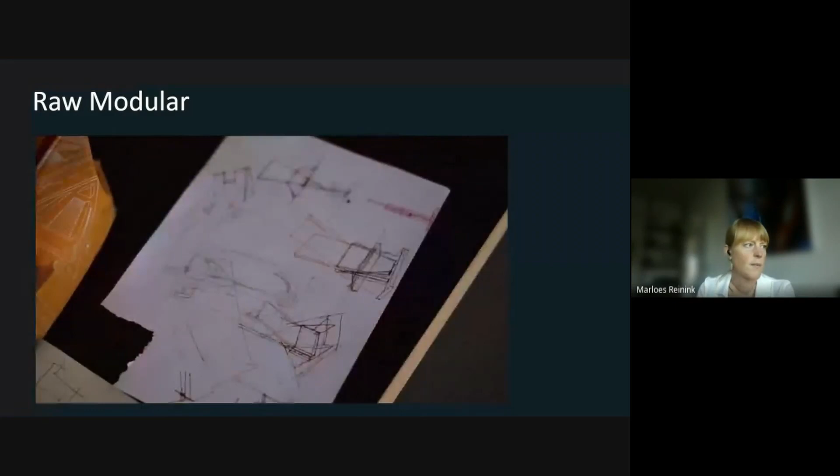Welcome to Raw Modular. 15 students from the University of Pretoria were given the opportunity to eat, sleep, and breathe the Raw Modular experience during a plywood design and construction week. The brief was simple: to design a structure or structural system out of modular plywood parts that spans at least 4 meters over an uneven surface and that can handle the typical directional forces such as tension, compression, torsion, and shear force.

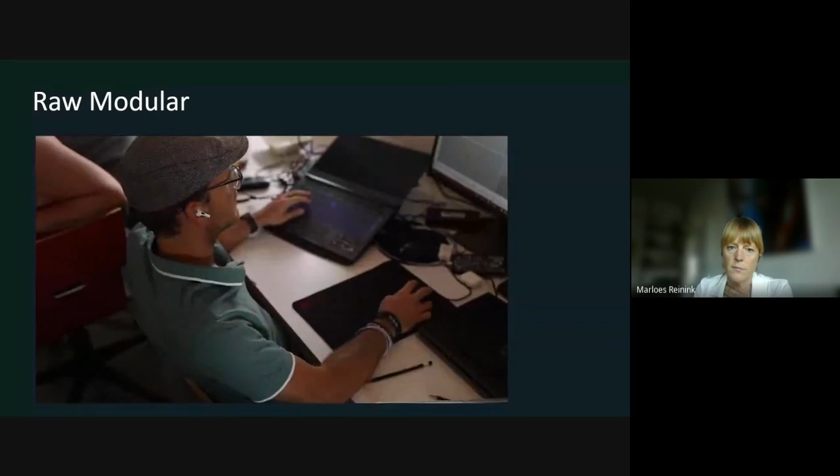Ultimately, they had one goal in mind: to produce a full-scale prototype that can withstand half a ton of pressure. The 15 students were divided up into 2 teams, eventually named Team Armadillo and Team Greyhound. Each team started by developing their ideas into concepts, which, guided by experts in the field, they were able to translate from conceptual designs into workable solutions using the latest CAD and CAM software.

Laser cutting and assembly of their initial design solutions into 1:5 scale cardboard models helped the students not only to analyze, but also visualize their designs before moving on to the full-size prototype. After a meticulous nesting and toolpathing process, an excited atmosphere surrounded the CNC machine as each piece was precisely cut. As a team, they had to work together to assemble and join the components. When the structures were assembled and many selfies were taken with the results, the only thing that was left was to test the prototypes by subjecting them to heavy sandbags.

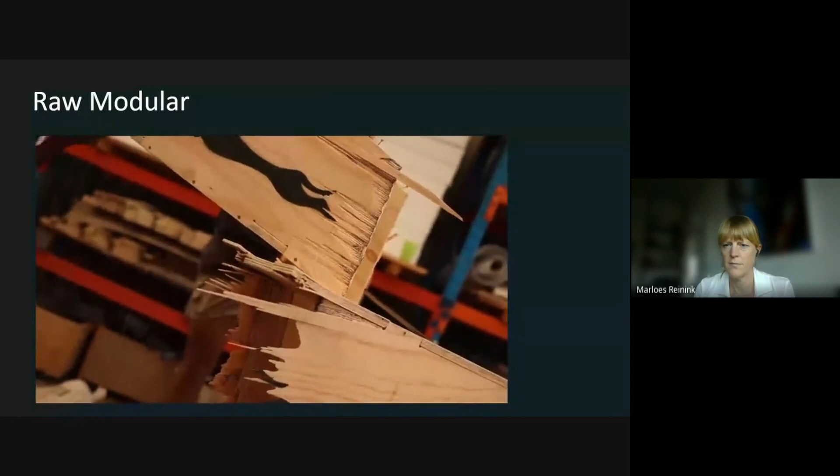As you can see, Team Armadillo's structure handled 12 sandbags with ease, which is the equivalent of 500 kilograms. Team Greyhound's structure did not make it to 12 bags. Due to a small flaw in their design, they were left picking up the pieces. Team Greyhound's error in judgment did make for valuable lessons being learned in the various ways of joining and fixing plywood. Let's take a moment to hear from the students about their experiences.

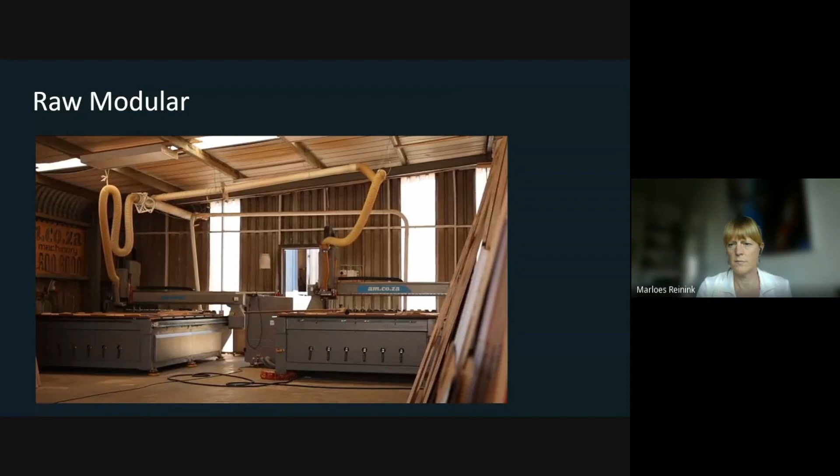Well, what I've enjoyed most about being at Raw Modular is, I would say, the sense of community in how the staff look after each other and how we work together in these tight-knit small groups. The most interesting thing we learned this week is the unexpected ways in which timber can be used and applied in different ways. Piet and Clara have been amazing. So this whole environment has been quite conducive for us to learn more, in terms of digital workshopping and construction.

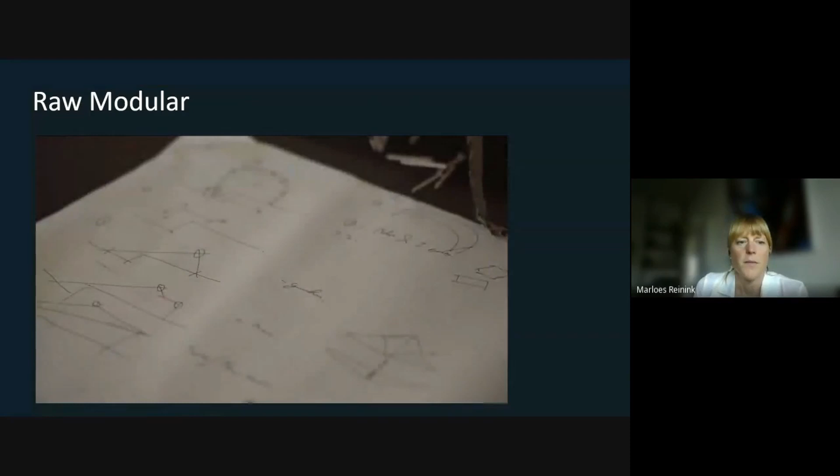I think one of the coolest things I've done was the camping experience. Yes, it was a bit cold in the beginning, but then I guess we have adjusted so far. Getting to know one another, getting to learn from one another, and also seeing the progress from students, how they learn all the skills in a very short period of time. And the output's been amazing. How a theoretical idea translates into a physical item and working with your hands to accomplish that.

We're here with 15 students this week. These are architectural students who are eager to learn about digital fabrication and timber construction. So the University of Pretoria, in association with York Timbers, have set up this program to further the timber construction industry, exposing young architects to ways of fabrication, ways of design, structural, plywood, strategies, etc., to get them up to speed with the fourth industrial revolution, as they're calling it.

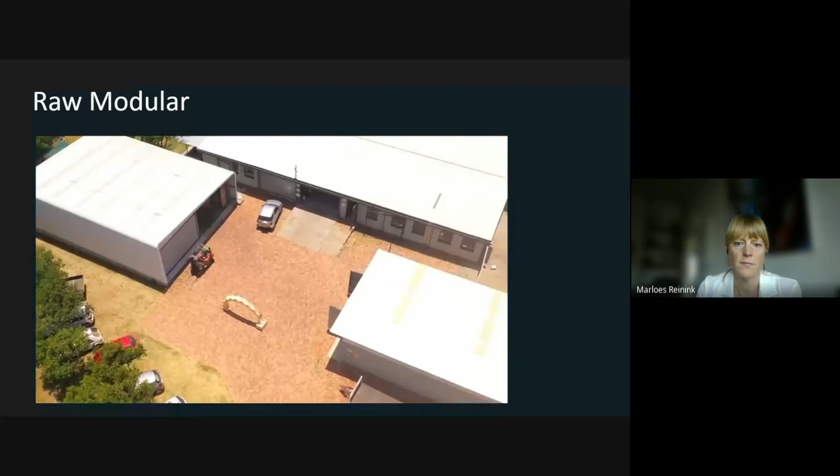To the group of students, we've learned so much from each other. We were seriously impressed by the way you approached the problem from different angles to create two very different, yet innovative outcomes. And we are extremely excited for what the future will bring. From all of us here at RAW, we thank you for this experience.

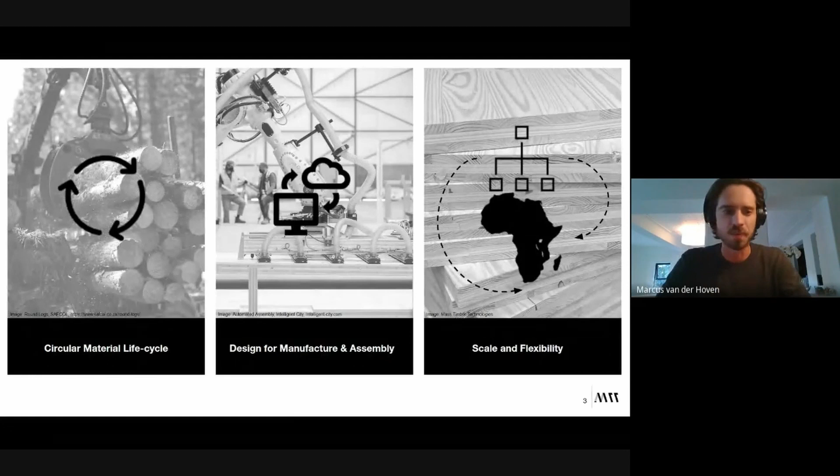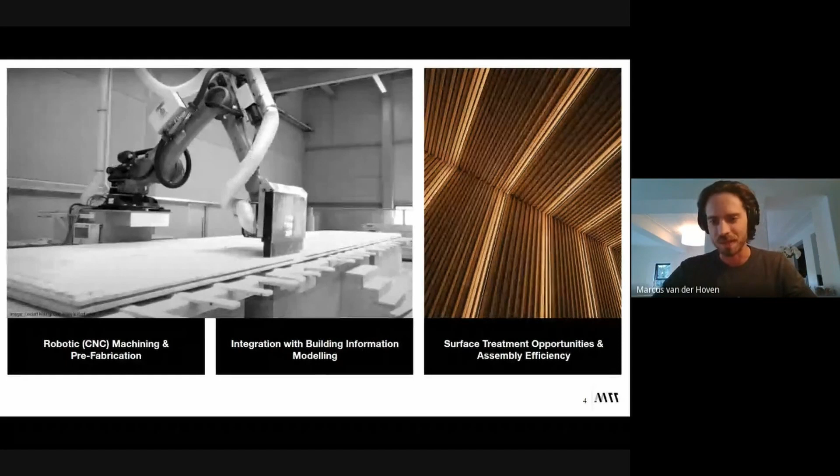And it's important for us to bring some of these concepts forward as we become more aware of the impact that construction has on the environment, the impact that it has on our economy, and the impact that it has on our future. And it's important that we don't really sit back and wait for the disaster to unfold, but stay proactive in developing and continuing the progression of material knowledge, fabrication ability, and design capability.

So today I'm going to touch on 4 key aspects that we think are really important for the larger industry to start becoming familiar with as we design mass timber structures. We've managed to figure out the process of creating the material from a locally available source. And now it's up to the construction industry to skill itself up to accept this material into its process.

Testing of the material all the way through structural, fire, economic, and in terms of longevity, we've been able to prove these concepts throughout the mass timber life cycle. And we're finding that a lot of the key aspects that need to be worked on at this point are really the understanding and the capability of architects, engineers, quantity surveyors, and consultants in general to really engage with the projects of the product and allow it to integrate itself a little bit better into the environment.

Just to touch on a few elements again, to drive the message home for what we're talking about and why this is relevant in the larger construction industry and the larger drive towards a more positive, sustainable environment. We all know what the impact is of construction on the environment, and key to this is the impact of the manufacturing of a lot of these materials. When it gets to site, that's one thing, but the production process of elements like steel, aluminium, and concrete bear the brunt of the force of CO2 emissions and the global warming impact on the environment.

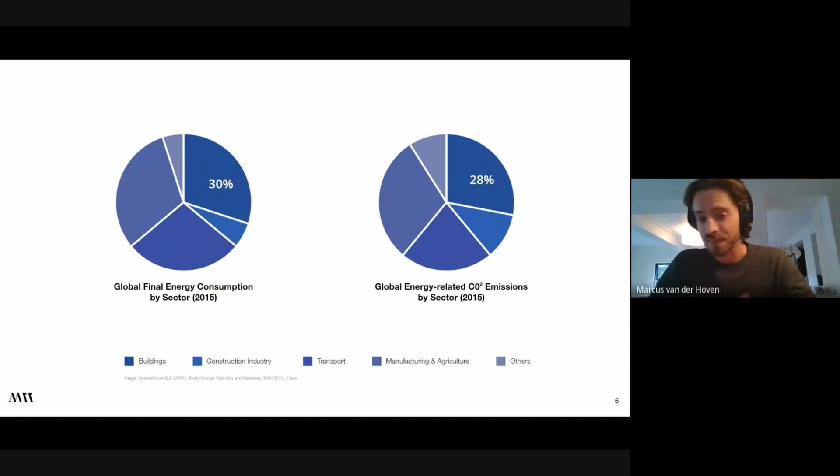And this is where we see the low-hanging fruit really for a new structural material that can replace a lot of different elements inside of a building and have a massive impact on our environment and the health of people around us. And that's really what we're tackling.

Importantly, again, these movements are happening all over the world, and South Africa seems to be dragging its feet. As a total population, our local GDP ranks only 32 in the world. So we're not really punching to the weight where we're actually emitting. We're listed as the 12th highest emitter of CO2 into the atmosphere globally, but we don't seem to be pulling our weight in terms of economic contribution. So we have quite a lot of catching up to do.

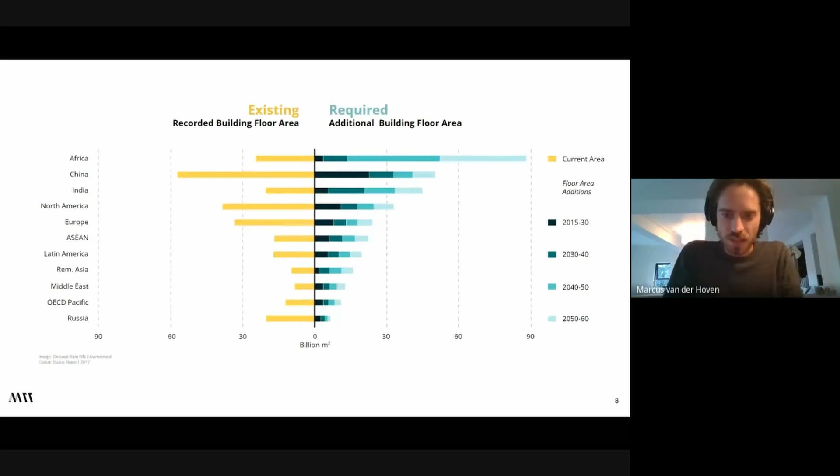And when you contextualize the requirements for building in general over the next couple of years, you can see that the population requirement and the development requirement in our country is far exceeding that of the rest of the world. So it's our opinion as quite a young team that there's going to be a serious boom in construction and construction requirement in Africa over the coming years. And we need to have the technology in place to be primed and ready for this boom.

There's a lot of different elements in policy that are also starting to affect us. We've seen that the C40 policy that's come through over the last couple of years is aiming to have new builds in South Africa net zero by 2030, and all buildings by 2050. And what's interesting is that it's not only the architects that are understanding this and fighting for this, but developers are starting to open their eyes to this.

This is probably going to be one of the largest liabilities on a development portfolio inside of the next 10 to 15 years. So there's huge progression in terms of thinking and questions that are being asked in new project developments that we're exposed to. And it's up to us to really develop the technology to feed this hungry monster of construction.

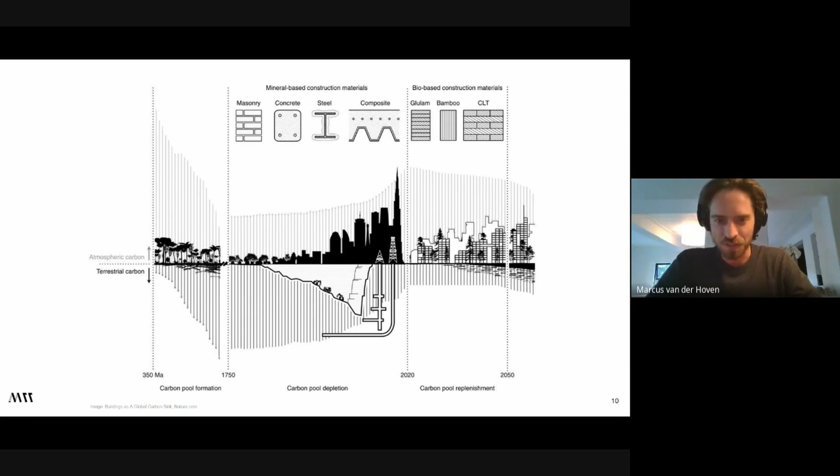We're seeing this large movement from a mineral-based material system to a more organic, bio-based, fiber-based system. It's a process that's happened over millennia in terms of a carbon pool being generated through trees decaying and turning into coal, and then us mining that over a couple of 100 years, and we're trying to basically turn this thing on its head and replenish our carbon pool back into the earth and sequester it so that our atmosphere remains breathable and our temperatures remain cool.

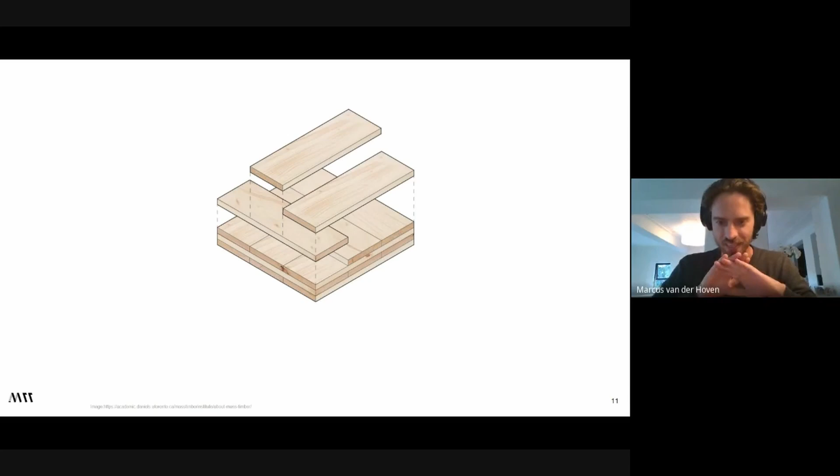So let's talk about CLT as the solution. I'm not sure how many of you are familiar with cross-laminated timber, but it's a fairly simple concept. We're using the structural capability of solid timber, and we're basically adhering it together in a cross-laminated perpendicular lamination, which essentially allows for an understandable and, what's the word I'm looking for?

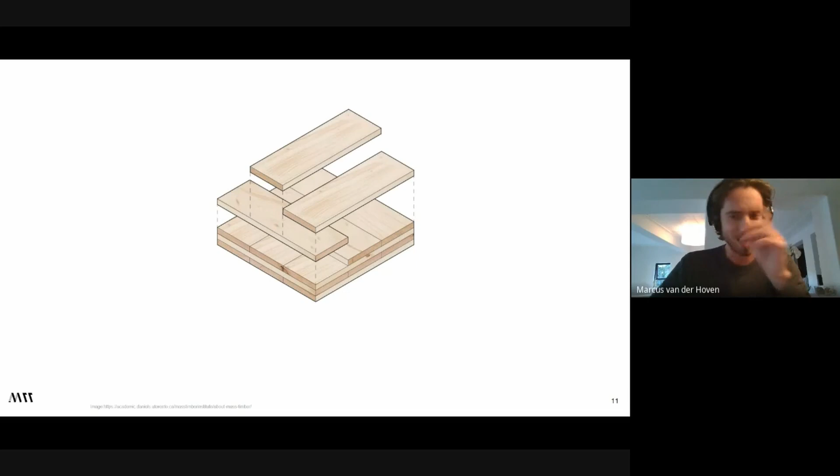An understandable engineering curve, so it's predictable. It's a predictable engineering value that we can then design with in a rational way. Organic materials tend to have different strength characteristics throughout their actual form, and we're trying to turn that organic material into a uniform number that we can then design with rationally and predictably.

And that's just one of the elements that I want to discuss today, which is hybrid timber construction, where we make use right now in 2023 of the best characteristics of each material, where concrete may still be required to perform a certain requirement, but we can actually replace a majority of the concrete we would typically use to construct the remainder of the building, or use timber specifically in primary structural elements to lighten the load of that structure, lighten its foundation loads, and sequester carbon while we're doing it.

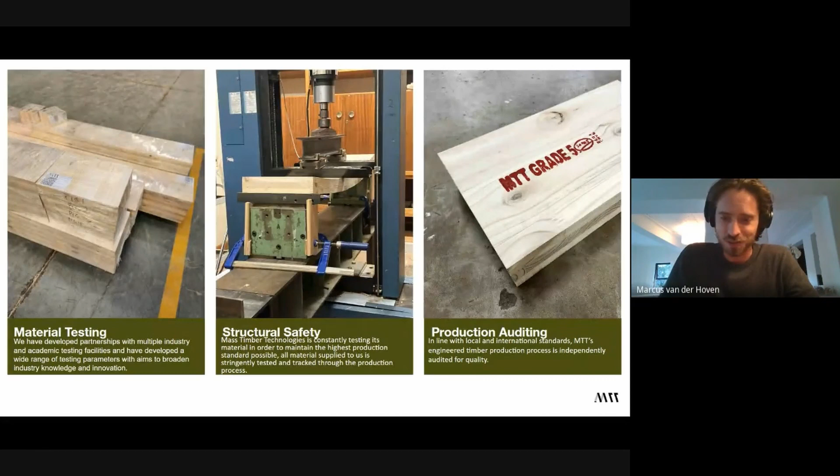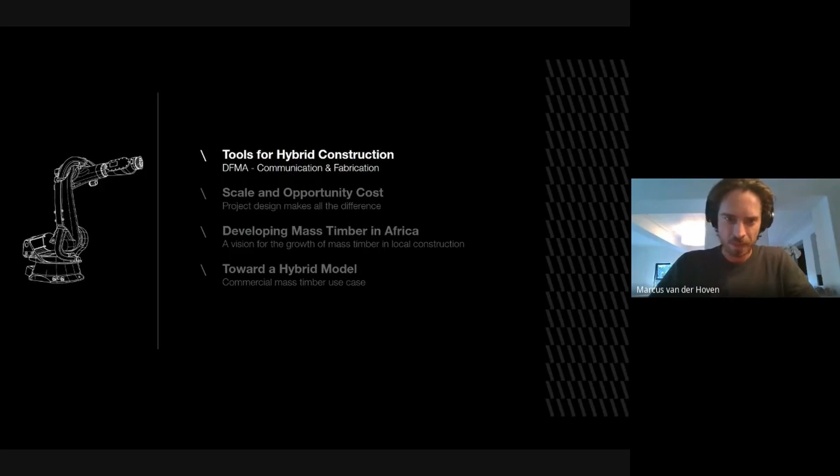So some of the things that we need to just run through in terms of designing. It's all good and well that we want to design with CLT, but how do we do it? The big questions are really around the cost. It is more expensive than pouring concrete. That's true. We're getting pretty much to the same price as steel now, with the price of steel going through the roof. But we need to really look at how we make the process more efficient to make the product more efficient in terms of its costing. The whole costing profile needs to be redesigned, but there are really interesting ways that we can make this process work from the design side, rather than trying to replace concrete one for one on a project. So the first benefit that we have with CLT is prefabrication and robotics.

So our system at MTT runs around the CNC manufacturing process. We have a robot like this on its way from Spain. It's pretty much identical to what you're seeing here, where we've got a really massive saw blade attached to the end of an industrial robot arm, and we've designed software that will essentially allow us to run from any design software like Revit or AutoCAD or whatever it is that your profession works in.

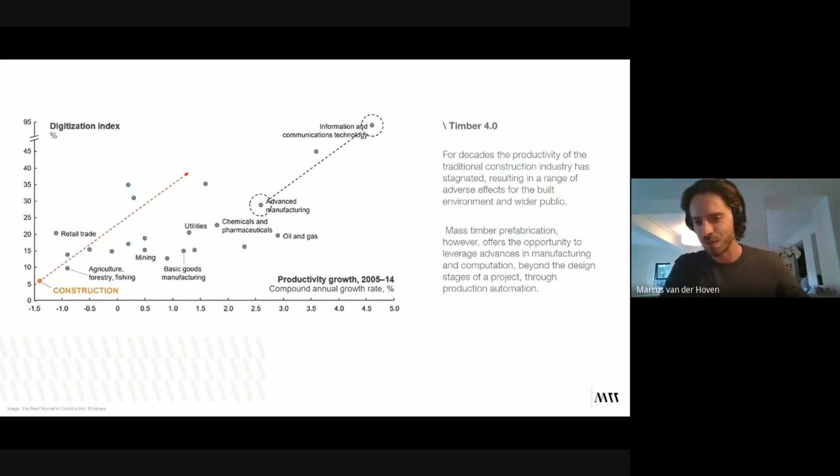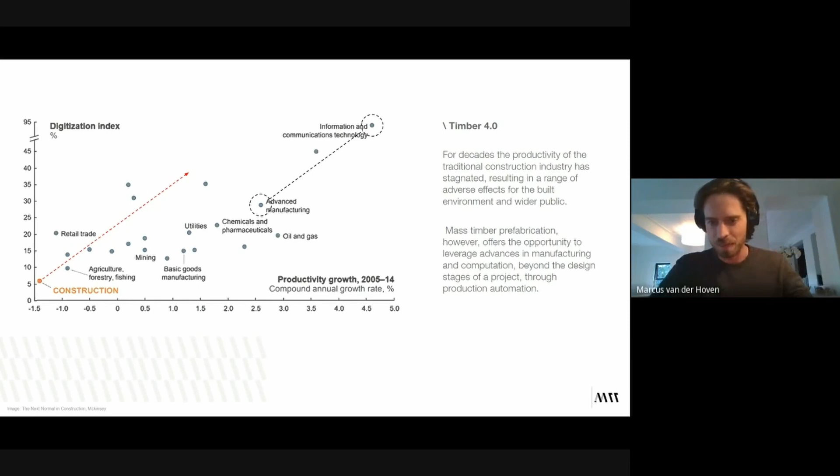So how we as professionals communicate with one another to make the process more efficient, to limit waste on site, limit changes on site, and allow us to get to a building much faster and help people execute the economics of their building more quickly. So getting people renting their structures faster, less time in your lending profile where your building is actually not being productive. And that's what we're trying to do. This is rapid build with a low waste profile.

The two products that we focus on at this stage are cross-laminated and glue-laminated timber. There's a lot of timber products out there that we could explore, but these two were the low-hanging fruit for us in terms of understandability, and our ability to actually engage with the value stream and the value chain and get it to market as fast as possible so that we can start innovating in the timber space quickly. So cross-laminated timber is really a very large block that could work as a floor slab, a roof slab, a wall, but really a primary structural element that can carry load. And GLT is columns and beams. With those two elements, we can start attacking quite a lot of different elements of the structure. And this is where we wanted to start with the process and start innovating.

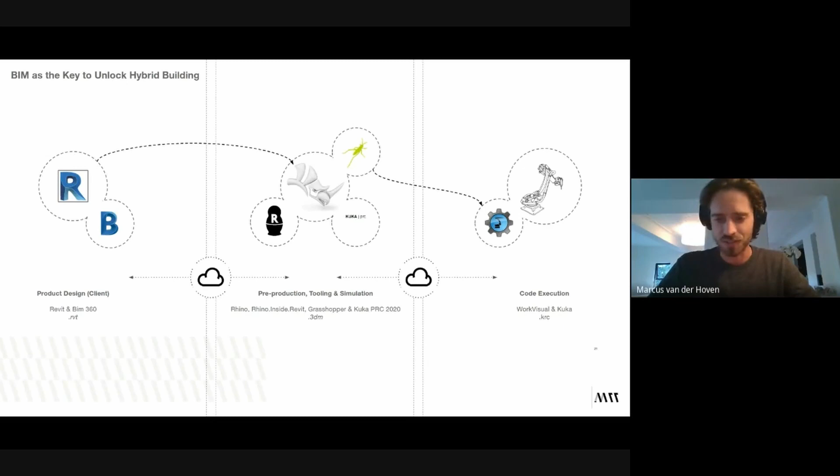The next thing that we started looking at was exactly that integration of Revit and building information modeling systems, take that into a manufacturing system. And this is, again, something that we're not seeing in the construction industry at this point. Usually we're looking at plans. As plans get submitted to a builder, the builder tries to figure out the formwork on site. It takes months to figure it out. There's often mistakes and rebuilds in place, and that's waste and that's time, and those are things that we don't actually want to do on our construction sites. We want to be quick, clean, efficient and healthy, and those are the elements that we're trying to push forward.

So once we start understanding the benefits of CLT, of course there are downsides to CLT. There's a lot of elements. It's not a silver bullet that's going to solve all of our problems, but we need to understand what it is that we're looking to make more efficient inside of a building. And I won't go through all of these. We don't have enough time. All of this is available on our design guide, which is free to everybody off of our website. You can go and download it and you can run through it. And it's quite a nice document to actually just familiarize yourself with all of those elements.

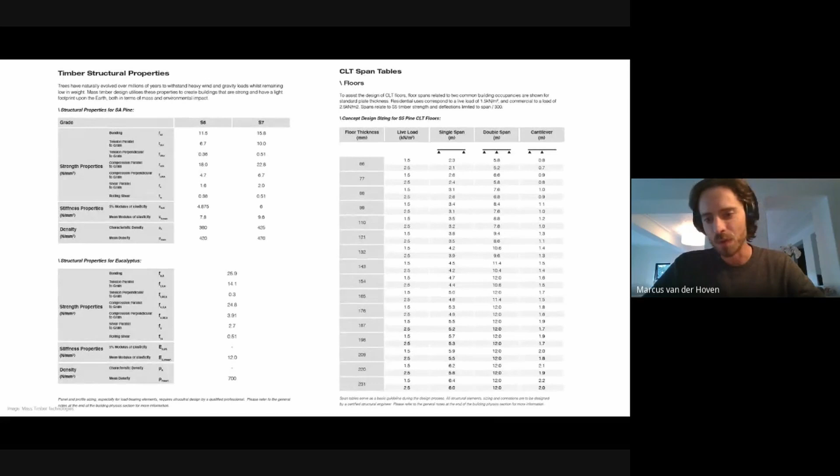We've even done all of the hard work for you guys. We've worked out all the engineering. We've tested the material. We've worked out based off of multiple different samples from different materials all over the country to get a rational design point where we can say, this is what SA pine at this grade and this is what eucalyptus at this grade are going to do. And you can actually start designing your structures now. Of course, we'll be able to assist you with engineering and your product design and your connections and how it all comes together. But ultimately, the work's been done.

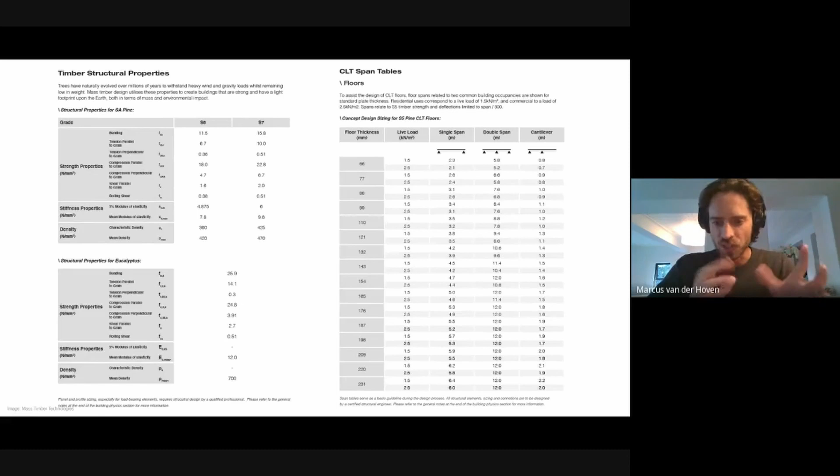So you can actually engage with this design guide and go and apply all of these elements to your own design thinking and start developing your buildings with mass timber in them. The thought concept here really for us is to move this whole process where when we start just designing and engaging with a project

program, we see that we've got to do a lot of different work. As an architect, I kind of get to engage with a lot of these different elements. An engineer has to engage with a lot of the different elements. The green consultants have to engage with 3 or 4 of these elements, and it creates this very sort of intersecting mesh of concepts that need to be rationalized between multiple professions.

And this is what we need to do on the cloud space with the building inside of a 3-dimensional space that can be shared and worked on collaboratively. And where changes are tracked and understood, we can actually work on these elements way more efficiently than trying to do it on site. And what we're trying to do is basically create a system whereby after all of this cross thinking and interweaving of professions, we just really want to put out a very simple process for the construction system, because that's where we see the waste and that's where we see the efficiencies really lacking.

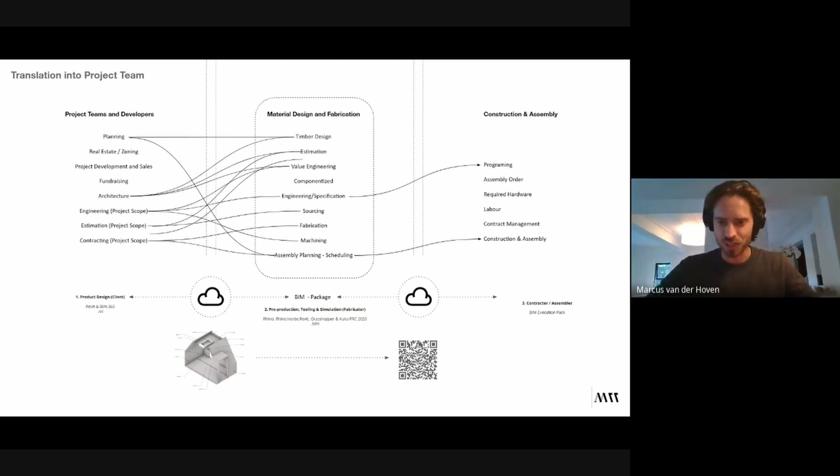We don't want to see this mesh on the other side of the material design system. So once it gets into construction and assembly, it needs to really be a program and an assembly diagram. So we're starting to think of buildings and building components as QR codes or barcodes. We can then just track parts, know exactly where they go, and think of it like a Lego instruction kit where you've got 3 parts, an assembly order, and anybody should really put this together without an issue.

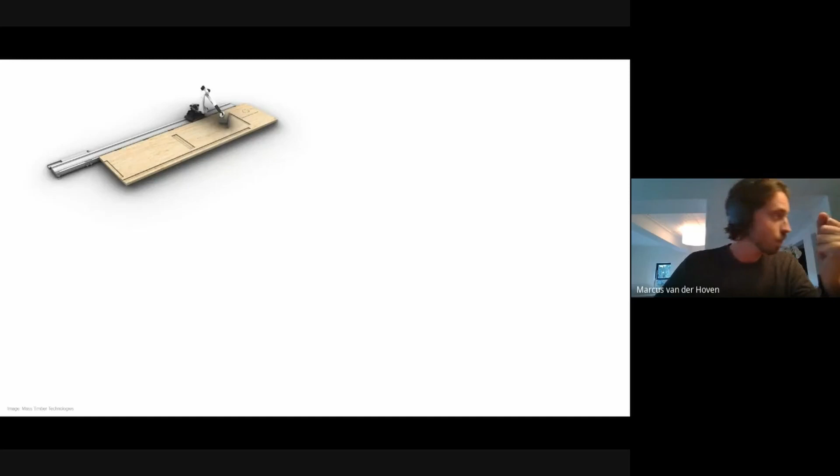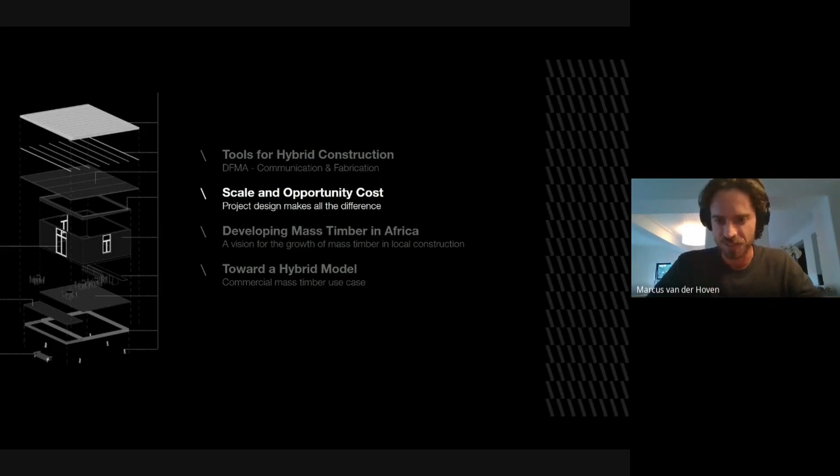Once we've gone through all of this work together, once we've actually completed the design and information modeling system, we can then go and cut these elements out on our CNC program to a very high accuracy, which again helps people just put things together on site in a way more effective manner. Once we've actually put these components together, it's important to just understand the scale and opportunity costs. And this is again where we start to rationalize the elements of CLT production in a contextual way in South Africa.

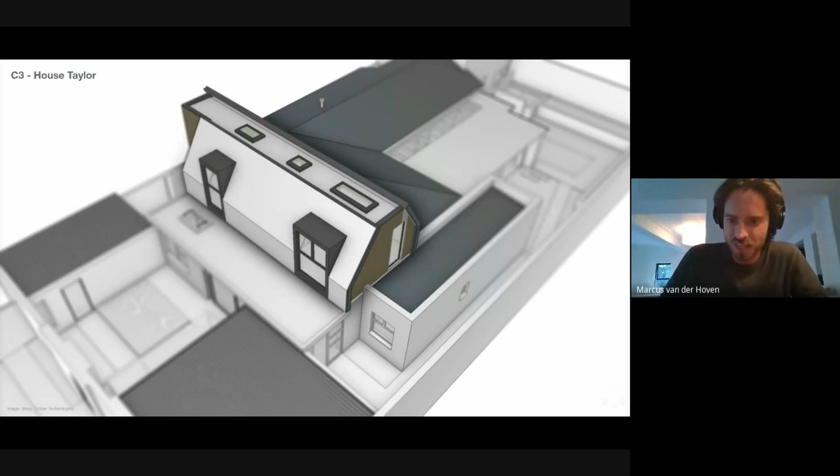So one of the projects that we've been working on is this House Taylor system that we've worked on with a local contractor, a designer out of Durban. He's done a project where they've removed a section of the roof and they've actually just placed a new first-story addition on top of the existing building. And a lot of the work they wanted to do was to actually ensure that the bottom of the structure was unharmed. They have a very expensive floor system on the bottom, and they didn't want to pour concrete slabs, and they needed to do this in a very rapid way.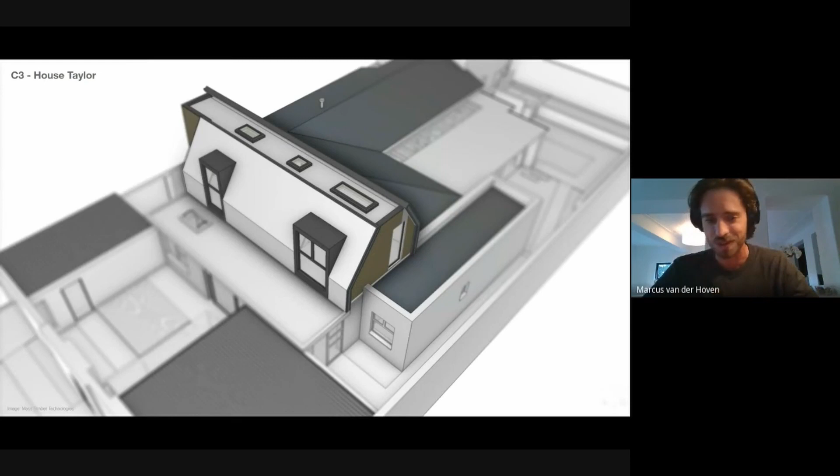So we designed this system. It was an entirely prefabricated system. We never actually met the architect in person, but we rationalized the whole system over a BIM conversation. And we created the kit of parts for the contractor to work with, and did all of the different component drawings. And we constructed this model as a mock-up inside of our factory. It was important for us to test this, as it was quite a complex geometry that we needed to put together.

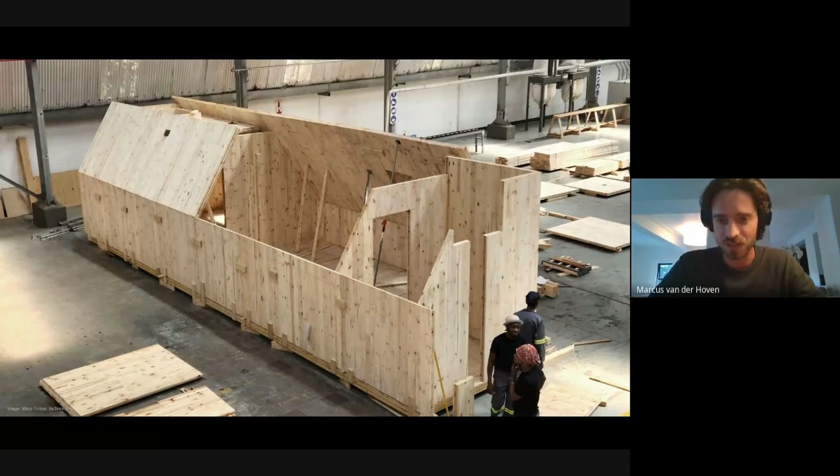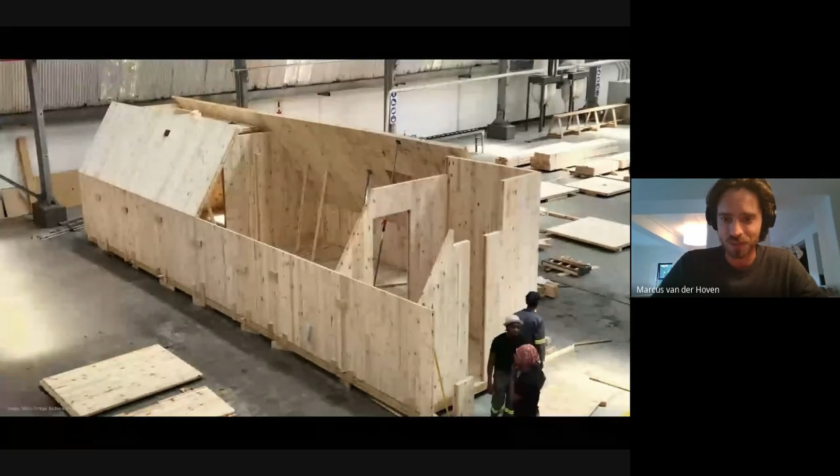And we managed to have a contractor come in with the help of our gantry crane, but without any of our assistance. A person who's never worked with CLT before was actually able to assemble this entire structure inside of one day, which is quite an achievement in our mind, considering how complex the geometry is. So this building is actually going to site next week, and there were quite a few delays with the weather over the last couple of months, but we're excited to see this happen in the real world on top of the structure. And there it is in its completed form.

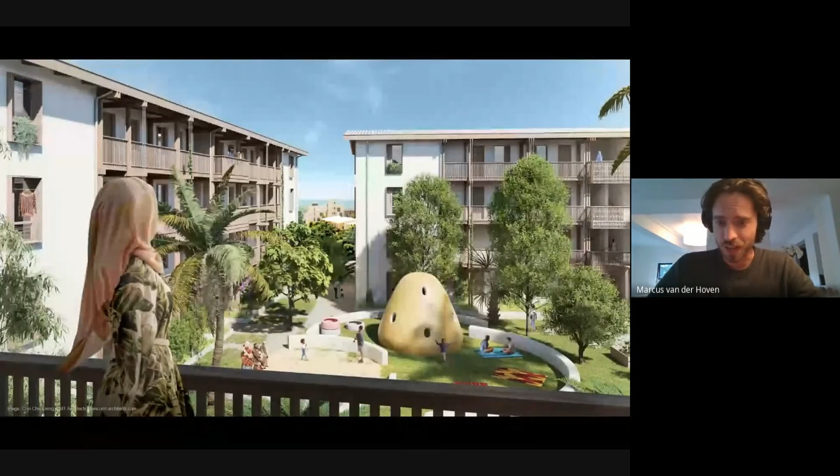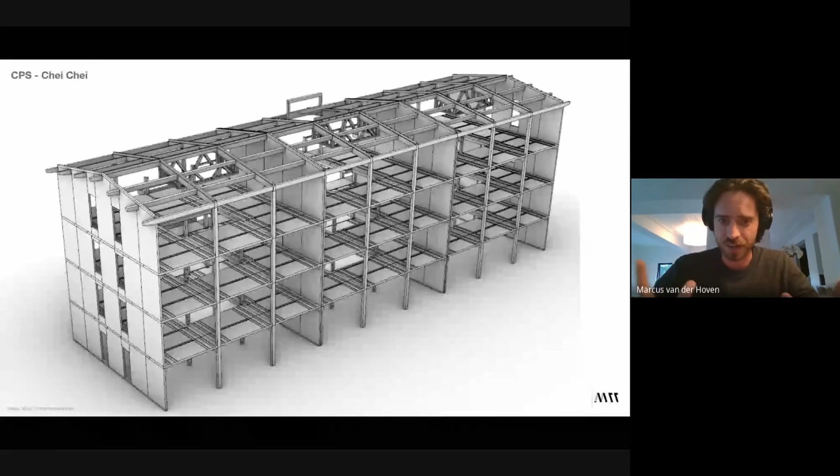The only element inside of this building that isn't timber are the concrete cores, which were kept concrete for fire regulations in Zanzibar. And the rest of the structure is glue-laminated beams and columns, and then the walls and the floor slabs. So again, the whole process was worked through a project team inside of a BIM space. We had an architect out of the Netherlands, an engineer team in Germany, and then we had the contractor in Zanzibar and Germany. He was running between the two. We developed this entire building all the way from nothing to completely fabricated without any of the project team being in the same room. And that's just testament to the power of building information modeling.

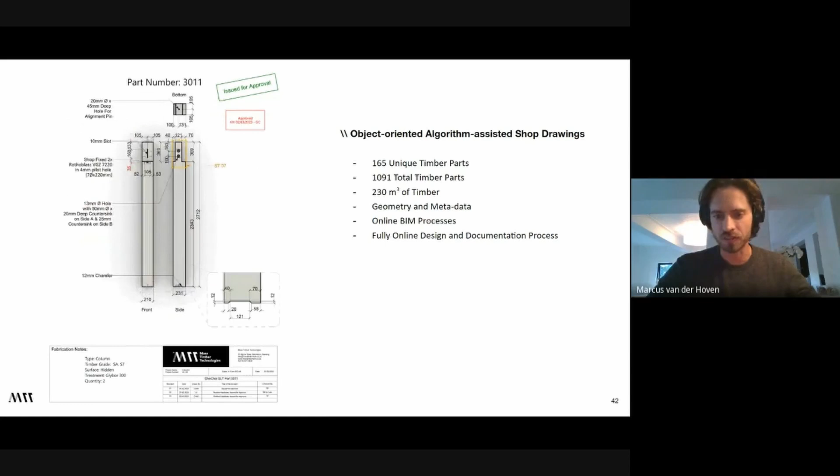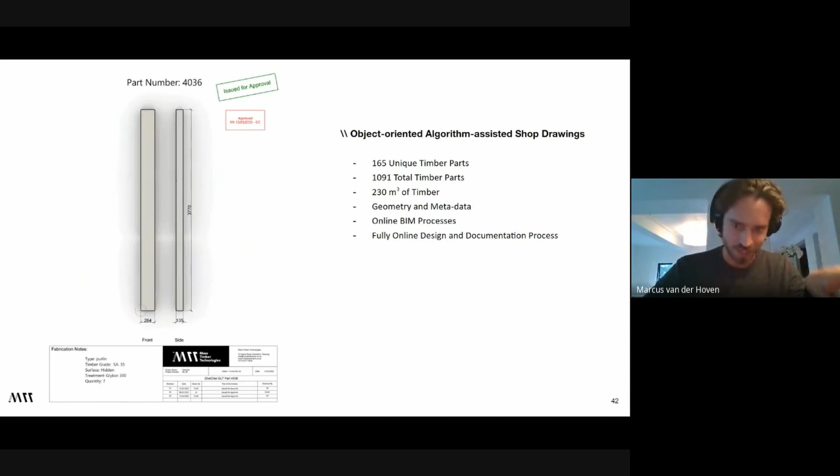You know, it's quite a unique project in the sense that we understood what the challenges are going to be for mass timber on this scale, where we've got concepts of 165 unique timber parts and 1,091 total timber parts that need to be designed, drawn, documented, fabricated, and then shipped in the correct order to ensure that the production system is put in place.

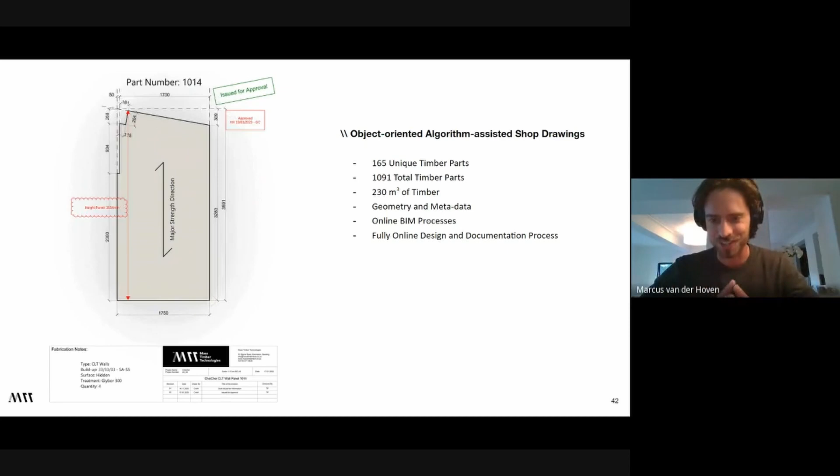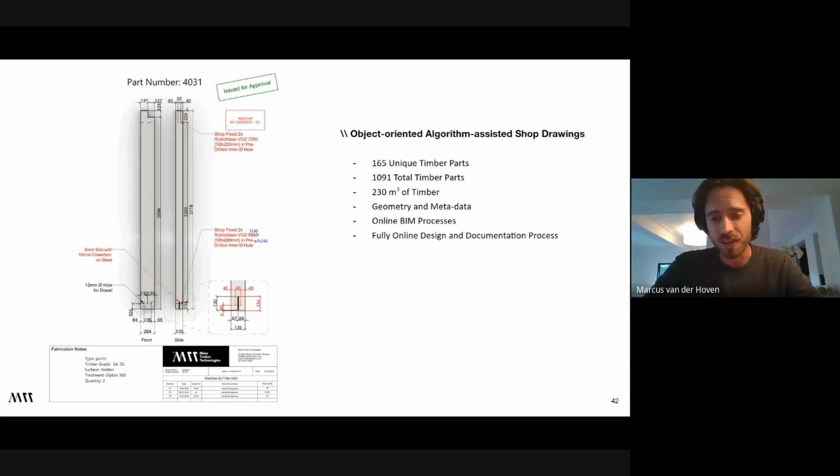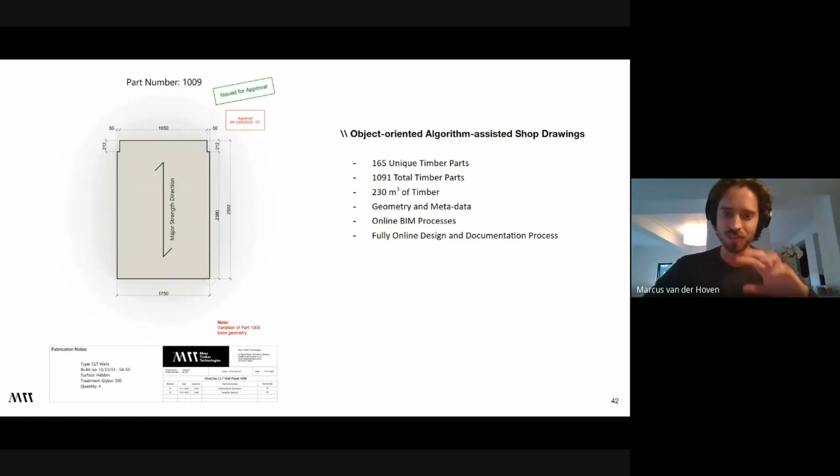But again, because we're smart millennials, we've managed to design all of our integration to happen inside of a computing space. So none of this work was really tediously drawn by a poor technologist sitting behind a computer and being fed Red Bull all day. This was a process of about a week. It was done by one person, and it was sent out inside of that week for approval. So this is where we see the power again of understanding your Rhino and Grasshopper integrations, being able to parametricize not only your design but also your documentation process. So this has helped us really elevate with a very small team and become quite effective in terms of being able to deliver these large structures.

And there it is. There's about 230 cubes of timber, weighs about 115 tons of timber. We produced it in about 3 months, which was a bit slow for us. We thought it would be a bit faster, but it was a bit of a supply chain issue over December with all the rain. It's leaving in containers next week, and we estimate that the structure will probably be built inside of a month, which they tested on site with another building that was exported out of Germany. So our cost profile in Africa is just a lot better. This is why they're engaging with us, and we're excited to see our first multi-level structure go up this year still.

So again, back to the design guide. Through this process of designing that building with the Germans and the Dutch, we've managed to leverage a bit of their design thinking to help us develop a set of details that are a bit more contextually relevant to South Africa. So we're not designing walls that are 500 millimeters thick with 3 insulation barriers and moisture barriers on inside and outside and windows that need to do crazy things. We've managed to basically create the performance rating of a 2-brick wall, really. And that could be as thin as a 66 mil CLT wall, which can do the same sort of performance if you treat it right.

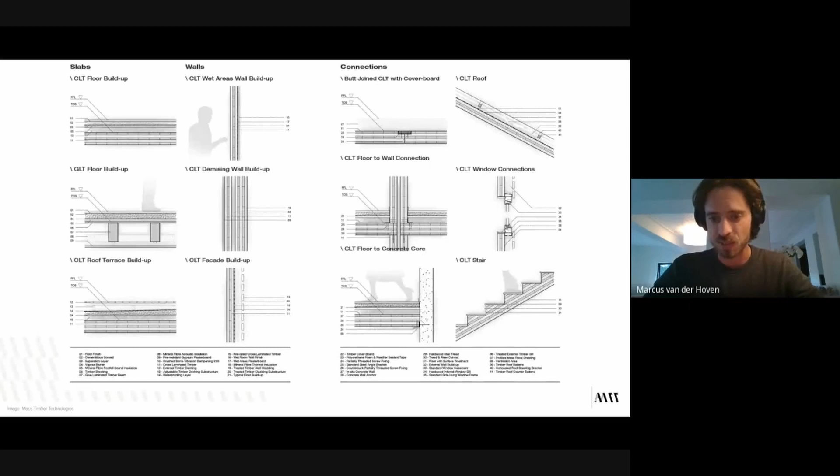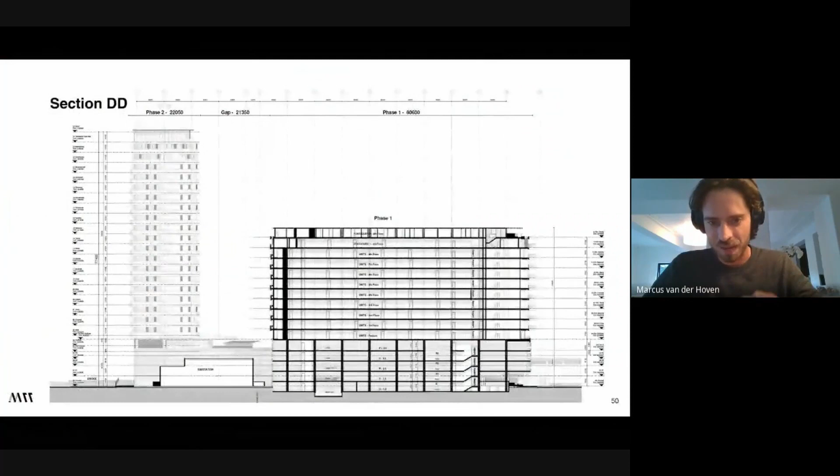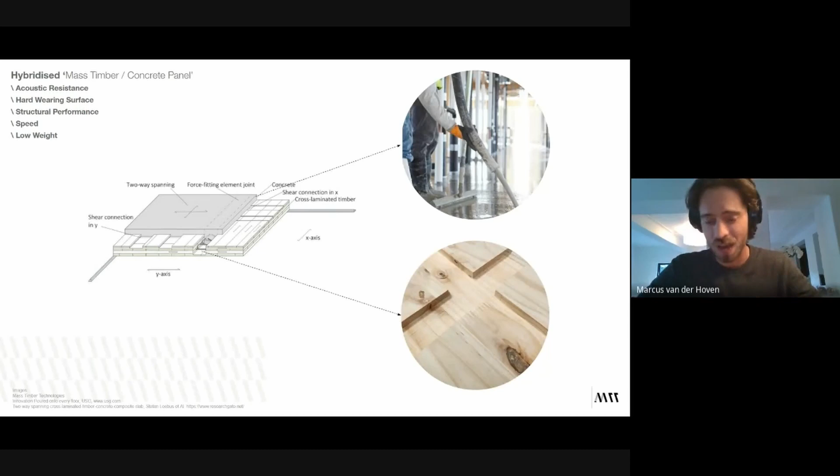Again, we just have to wrap our head around the core of the conversation. It's really not for me to convince you to use mass timber. That's up to you. The drive that I'm trying to push forward is that we're not messing around anymore with this technology. We're developing structures that are now reaching about 11 stories high, and we've managed to develop systems that can actually perform in a way that we can meet the regulation requirements for these heights. We can meet the cost requirements for these projects, and we can hybridize our system to make it work in a way that allows us to actually participate in the building environment.

And where we're starting to see this really work, and I'll leave you with this one thought, is floor slabs, for example. It's something that we've innovated over the last few months. And when we start racking it up against what we're used to in terms of reinforced concrete, we're looking at reducing a building's weight by 70%. If that doesn't say what it needs to say, then I don't know what more to do. We're sequestering carbon and we're able to reduce construction time and deliver something that's way more healthy than what's out there right now. And it's happening on a commercial level.

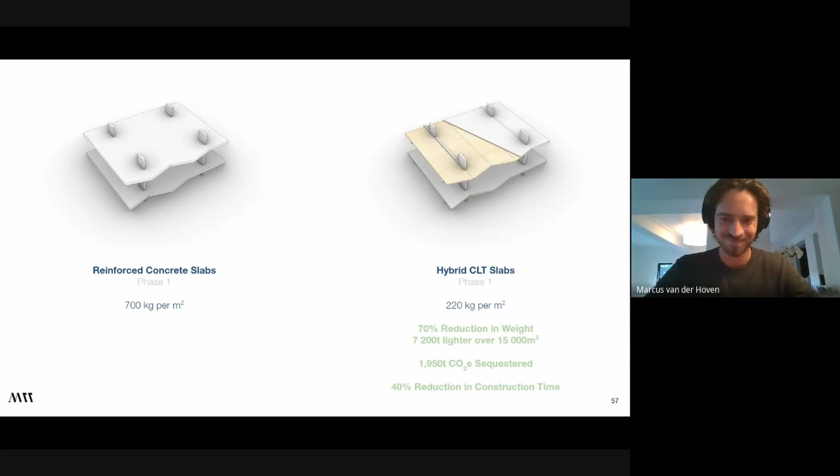So apologies for the long speech, but yeah, I'll leave it there for now. Okay, thank you. Thanks, Marcus. That was definitely very interesting.

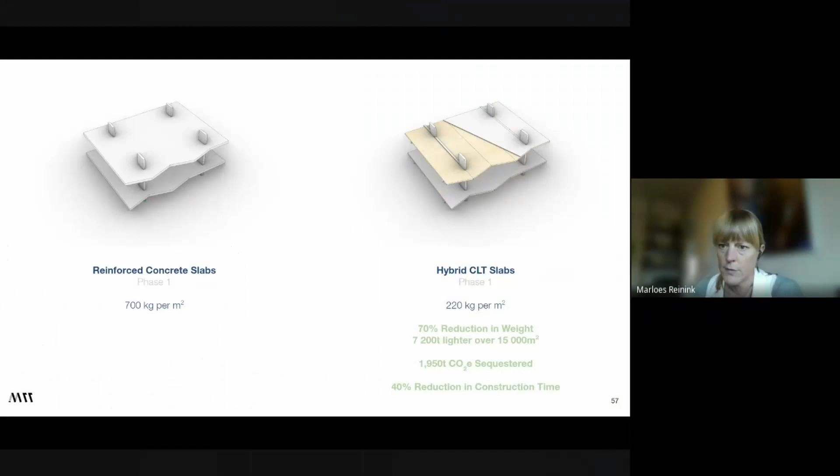From all the hands and thumbs up, I think people really enjoyed it. Let's go to Christian. Good afternoon. Yes, go for it, Christian. Okay. Yeah, thank you for having me, and good afternoon, everyone.

I'm Christian Greyling. I'm a candidate architect here at Earthworld Architects, and today I would like to talk to you a little bit about how we, as a practice, approach timber construction in the South African building industry. At the beginning of this year, I was fortunate enough to be invited to give a talk similar to this at the Wood Conference in Cape Town. It's the largest conference in South Africa that's all about wood. It comprises a lot of speakers from around the world: architects, engineers, and developers.

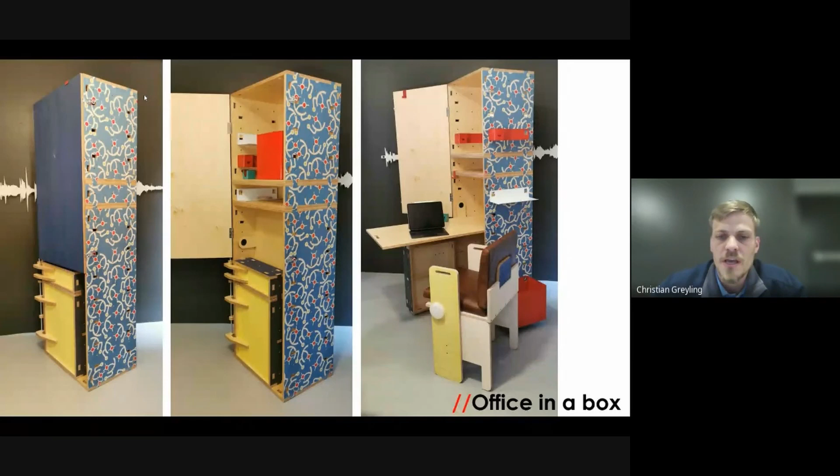It's completely customizable. You can have any color you want, any print you want, and you can kind of just tailor it towards your liking. So I would like to take that further to a secondary building element. So we've used what we have learned with the Office in a Box, and we've actually just enhanced that to create a complete partitioning drywall system. And this is really a multifunctional wall system.

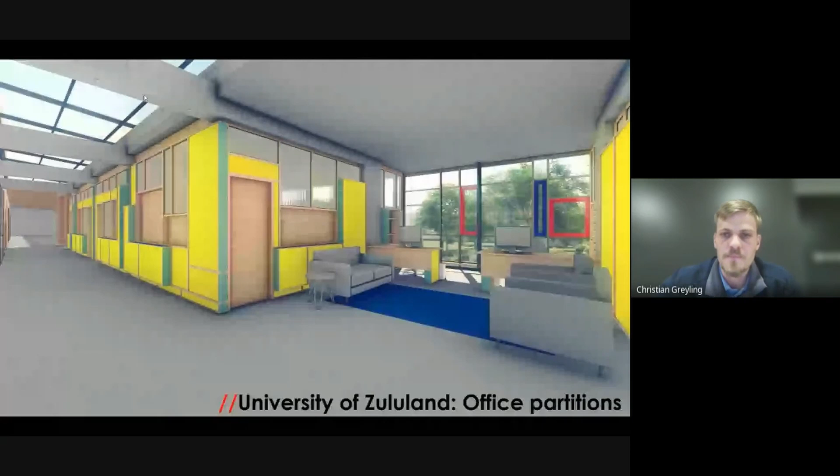So this is a project that we are busy with for the University of Zululand. It's the new engineering building in Richards Bay. And we're actually going to build these drywall systems within the building. It's all based on the principles of the Office in a Box system.

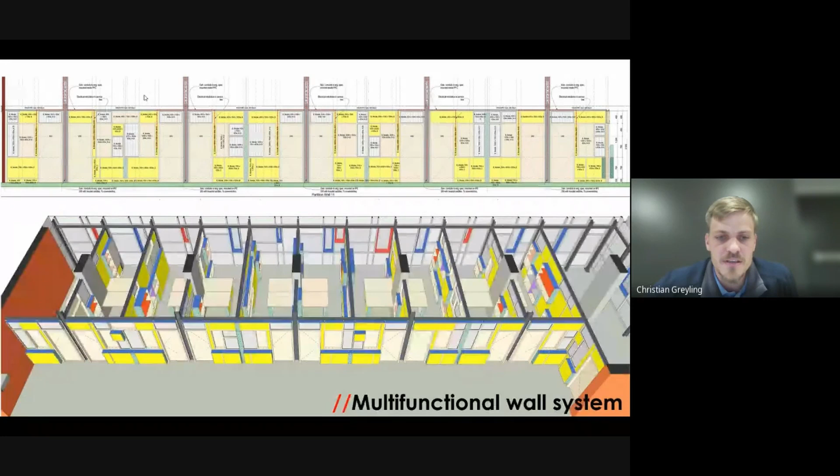So if you boil it down, it's just a bunch of boxes with different configurations that one can stack on top of one another, and you just bolt them, and then you have a wall, you have a desk, you have a bookshelf, you have a whiteboard, you have a pinboard, everything you will need in an office. And it also accommodates for all of your data and electrical reticulation services. So everything is contained within the system.

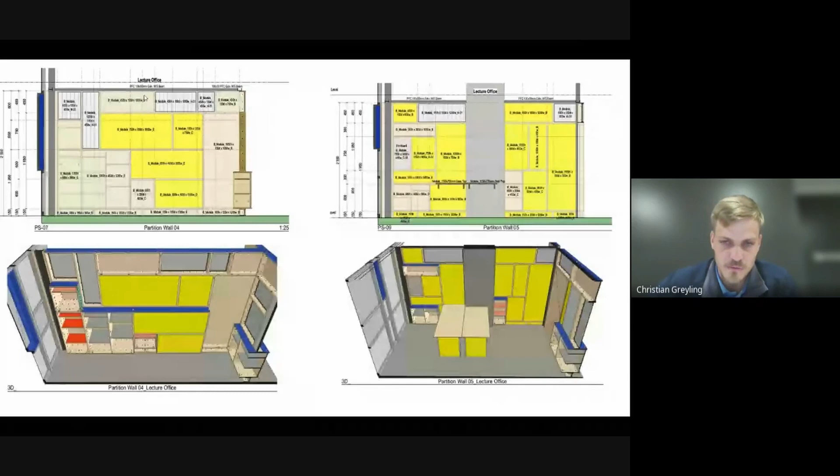And these are just some BIM drawings that show how one would assemble them. You can actually just give anyone these drawings and you tell them to put that box on top of that box, and then you'll have your walls. There's literally thousands of configuration types, different kinds of bookshelves, different kinds of desks, you can get whiteboards, you can get pin boards, service boxes, anything like that.

And this is just a modular thing that keeps on developing as we actually go. When you start to incorporate this in a different project, then you have different challenges, and then it can actually just evolve from there. It's a wall as a desk, a wall as a divider, in a completely functional manner.

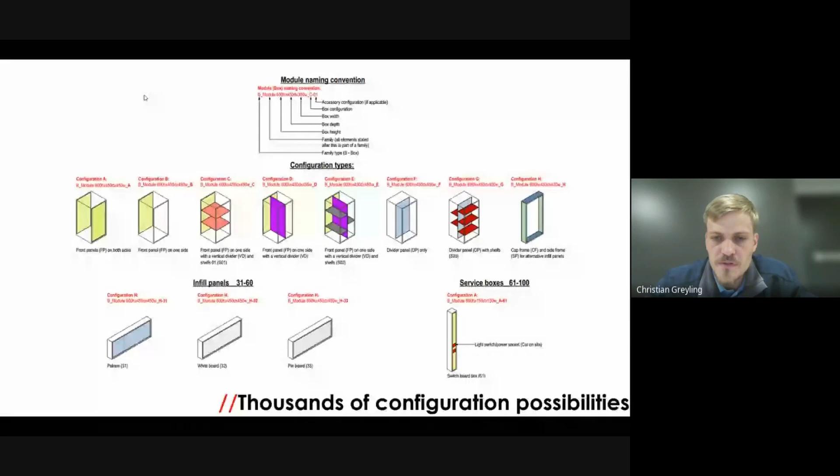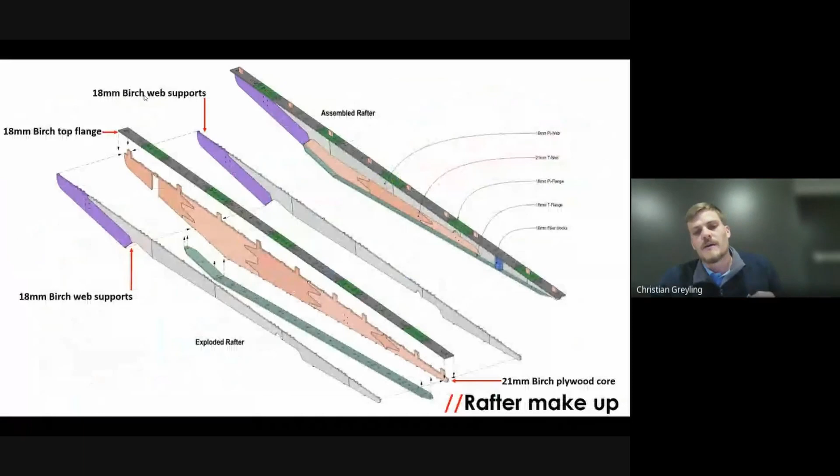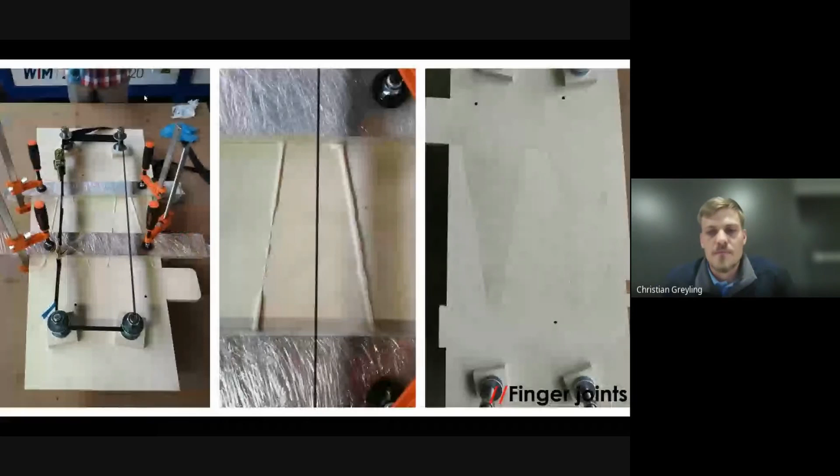This was the first iteration where we just figured out how we're going to do the joint testing. So this is the finger joints and how you're going to get a proper lamination on that. As you can see, we have these threaded rods with ratchet straps, and you just pull them together and you hold it in place and get a very strong joint there.

You also notice that we use dowels for locators. So if you do face lamination, we use the dowels just to line two elements up with one another, to make sure that the tenons align with the mortises of the flanges that come on later on. This is just a process where we do the finger joints. So you will do the first sequence of the whole thing, so you can do two beams at once, also cutting down on the assembly time.

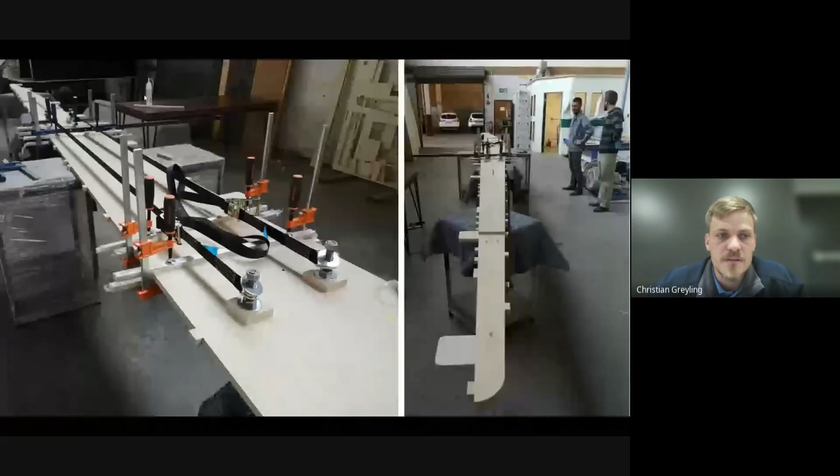This is just some more photos where you can see the lamination process. These are the longer pieces that needed to be finger jointed. And there's the first beam done. The next day it was taken to site to be delivered and installed, just to check if everything fits on site. And we had to drive all the way from Pretoria.

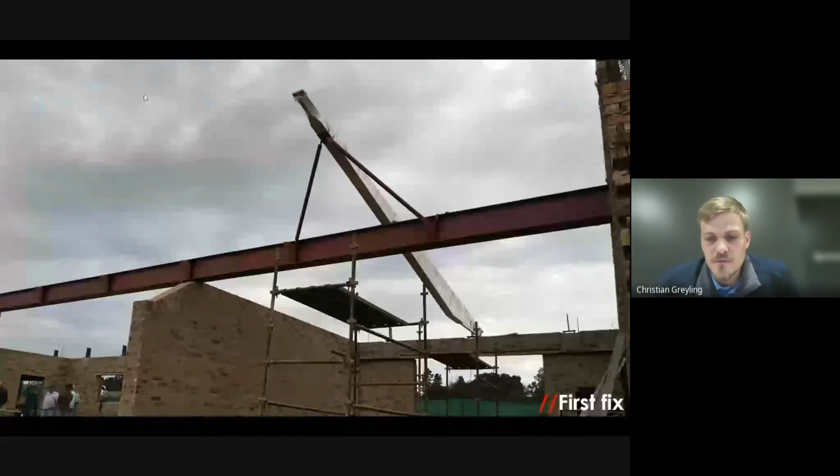When we arrived there, this beam was already up, and the contractor said it took him about 15 minutes from the truck to get it into position and bolt it on. He used five guys to lift it in place, and then just put the bolts through, and everything lined up perfectly.

And from here we just started with the mass production, doing two rafters in parallel. So if you do lamination on the one that needs to dry out, then you can start with another one, and that just speeds up the manufacturing process. Here you can see the guys lifting these massive rafters into place. And that's during the construction process when the one roof was done. You also see the ceiling boxes that are installed in here.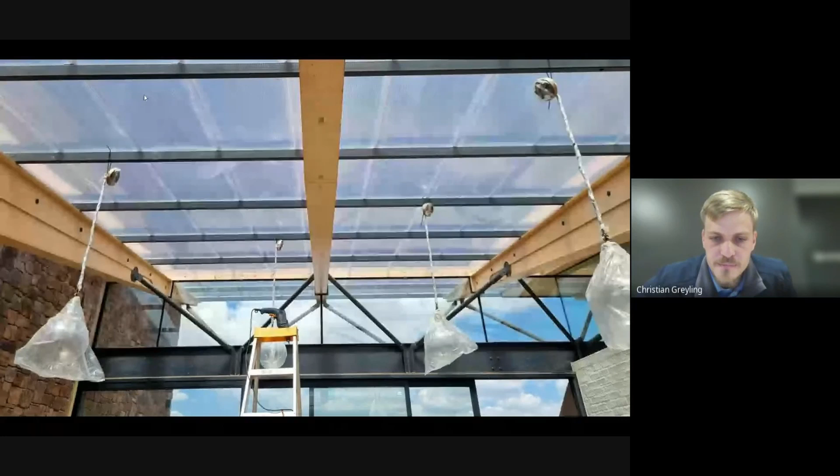This is the front end where you have the struts connecting to the rafter. And in this photo construction was almost done. You can see the clerestory in place, and it really gives you this idea of a floating roof. We also have a conservatory, so it's just a different roof covering, sort of like a greenhouse within the house. It gives a lot of light into the room.

These are some more photos from the bedroom wing, and then this was when the house was almost done. I don't have newer photos to show you. These are the most updated ones, and yeah, this is how it came out at the end.

So the next project I would like to show you is also for primary building elements, a project we did for the Royal Thai Embassy. They had a courtyard that was exposed to the sun, and they wanted to use the space to host meetings, and asked us to create a sort of covered roof. And we proposed this to them. So this is a plywood portal frame that has these large, we call them petals, suspended from the portals, and it really creates an interesting interior space.

So the way it would work, we used the same method that we learned in Potgieter. You would have your base plates, and you would have these small components. Because it's a courtyard, you need to get all of the components within the courtyard. The embassy is still running, so you can't disrupt any of their operations. So the aim was really to have small building components not wider than 1.2 meters, and you assemble it on site,

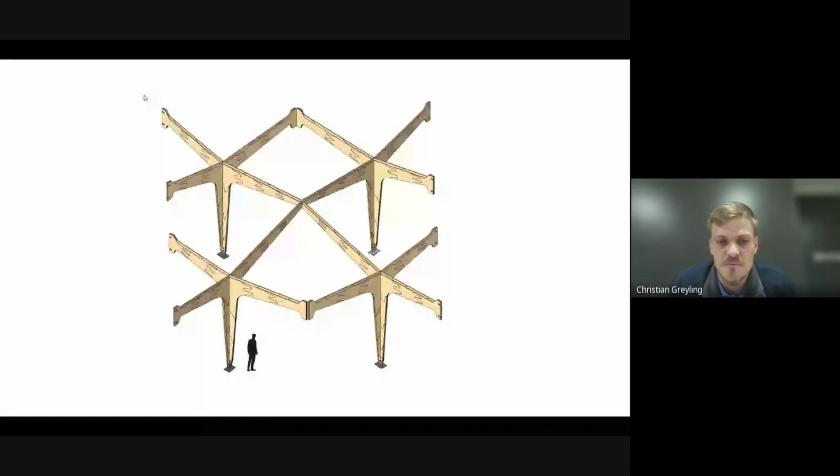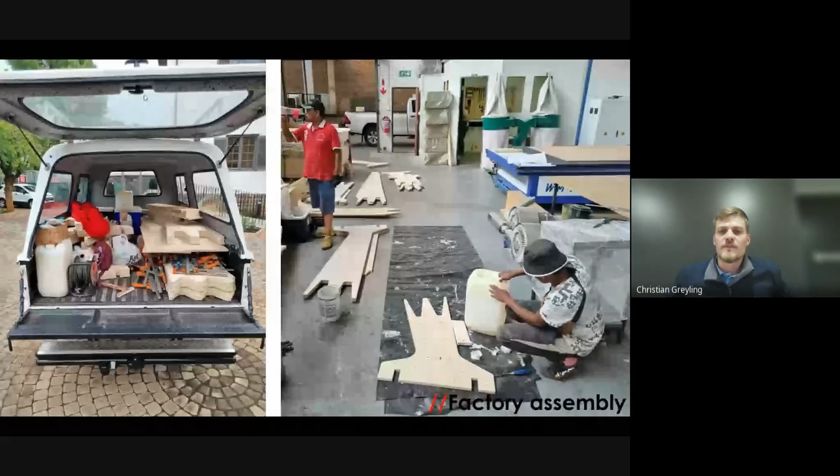Okay, so now that we've covered all of those, I would just like to show you some complete building systems, how we use timber for creating complete building systems. The first one is a project named Ko Spaza. This was an experimental project. So the idea of this is to actually create building components, and to have a portal system that you can just add to, and you can create a structure to your own needs. And this really allows anyone to build their own house, even if it's just a tiny little 3x3 meter shelter.

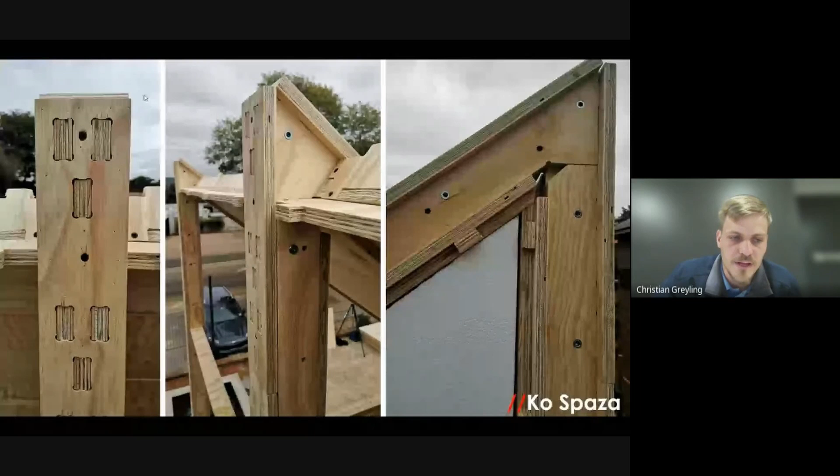So for this application, we use it as a coffee shop, but it can really be anything. It can be a tiny house. It can be pods arranged in different ways to create shelter. And here you can see the construction process. So first you will do the floors. You have the floor boxes, and then you build your first portal, your second portal, and then you put what we call the wall boxes in, and then you'll have your roof boxes.

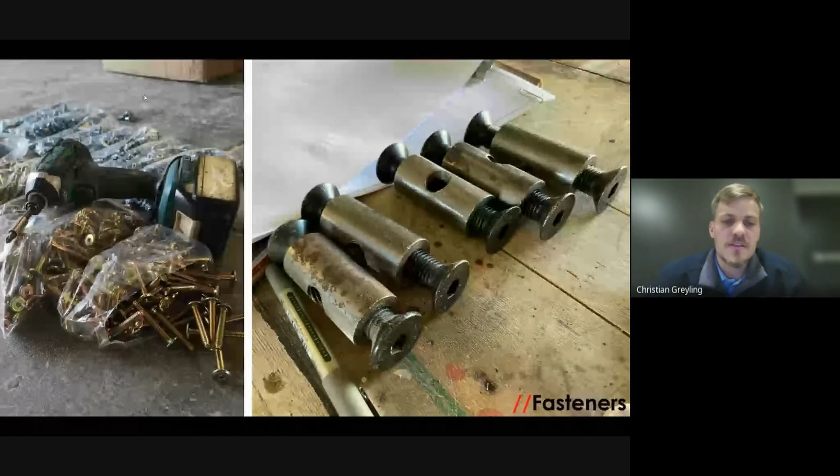And the whole idea with this system is it's kind of a monolith, a homogeneous system. So on its own, that portal doesn't do anything really. It doesn't have any structural stability. But once you add the wall box and the roof box, it becomes a really, really strong structure. So that's the thinking you need to have when you think about designing these kinds of structures.

These are just some of the fasteners we use. Some of them are just normal off-the-shelf items. And the ones you can see on the right is what we call a pivot connection, something that we've developed to create footings out of, which I will also show you. Some of the components have been cut in a factory, and they are laid out and assembled, and you really just need a few screwdrivers and a rubber mallet. You just knock them all into place.

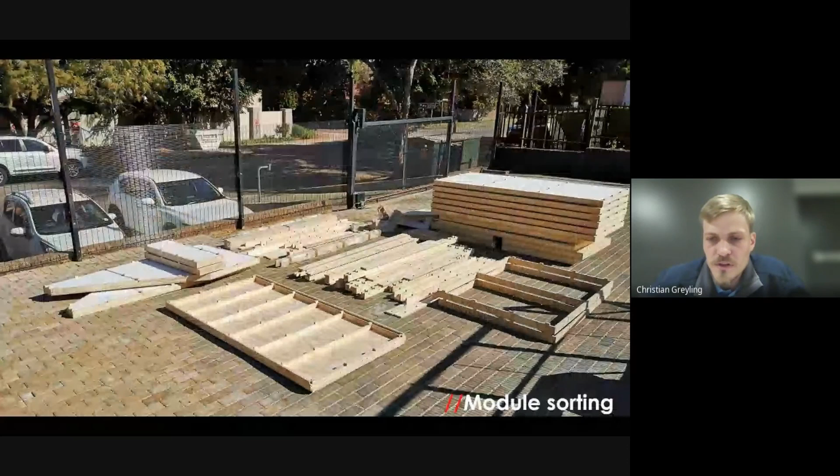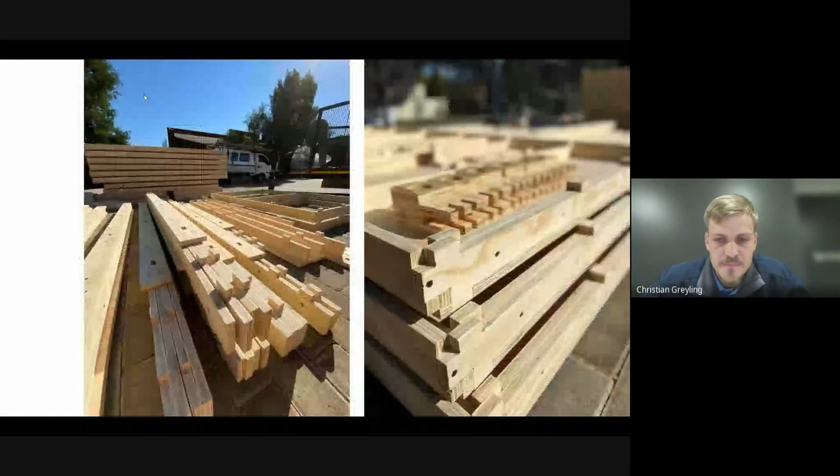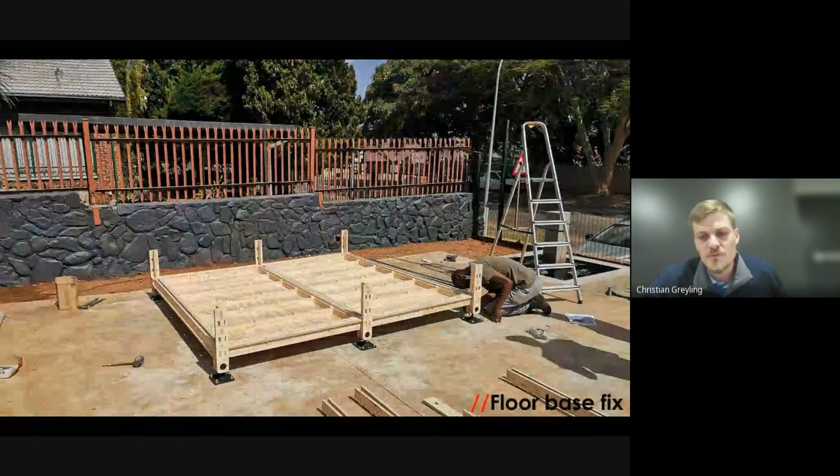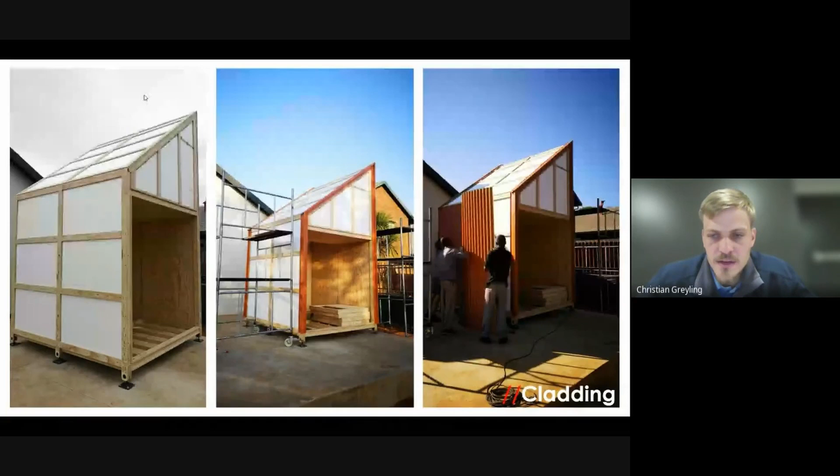So this is a very small structure. It's 2.4 by 2.4 meters. Here you can see the first portal going up, wall box going up, and then your roof box going up, and you already have a lot of structural stability with just those elements in place. From there, you put in your insulation and then your cladding. In this case, we used just normal S profile corrugated, but you can have anything on it. You can have timber cladding, Nutec cladding, whatever the case might be.

This was a really pleasing project to be a part of. You really see how people that haven't done anything like this can actually build a structure, and you can see the reward there is in building something like this and having a complete structure at the end of the day. And it's a really good team building or teamwork exercise.

There's not really that much frustration, because everything just fits into one another, because it's all been figured out in the virtual realm. So it's a very smooth process, and that's one of the magic things about these kinds of construction methods, just from a human perspective. But here you can see the end product functioning as a coffee shop. So the last project I would like to show you is a much bigger scale project.

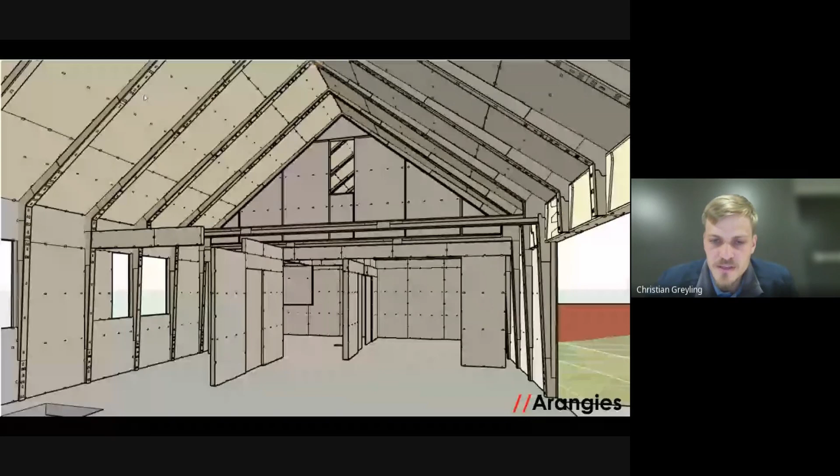So here you can see, these are screenshots from the model. Your concrete slab with the base plates that have been set out, and then from there you would have your plywood portals that go up, and then you have your wall boxes, and this is your main structure, and from there you'll just have your cladding that goes on top of that. This is just a view from the other side, showing how that happens. So these components are a little bit more complex, but very easy to actually install.

So you just need to provide these kind of drawings. It's like a Lego set that you give to someone, and they just assemble all of these components. So this is, for instance, a wall box. It's straightforward, and all you need to do is sit with someone and tell them put component A to component B, and there you go. And it's a repetition kind of exercise.

They're all the same. So we would normally go out with the guys that do the assembly, and we will just build one of these portals with them, and then from there you can just leave them and they continue on their own. So yeah, these are the kind of drawings that you just provide for them. This is a beam being assembled, also with the insulation being built in, so you don't have to do that after the fact.

What's nice about this system as well is you can actually include all of your electrical and plumbing services. So all of those routes are predetermined, and you can actually cut all of these holes in your members as well. So you don't leave it for the electrician or the plumber to figure out where they should go. It's already incorporated within the system.

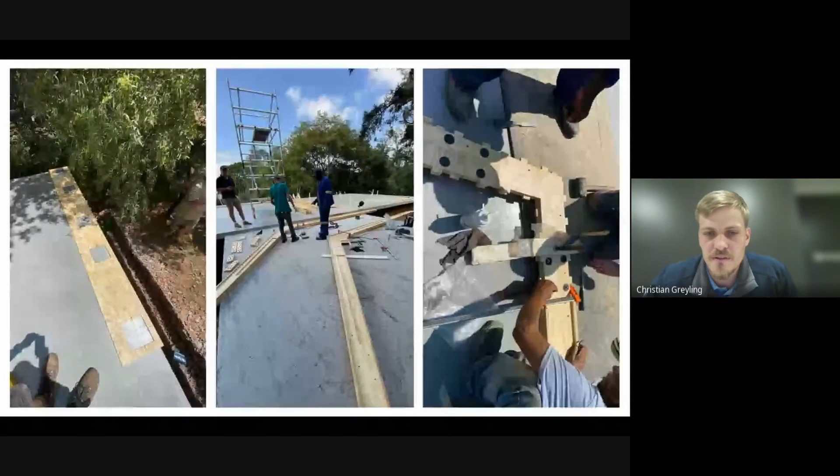This is a beam. I think this beam is about 500 mil in depth. It's a really, really strong beam, just made out of plywood. It also follows the same kind of principles as that house Potgieter I showed you, also with the finger jointing. And I'll just show you the final, well, not the final, the house isn't complete yet, but this is the first assembly of the portals.

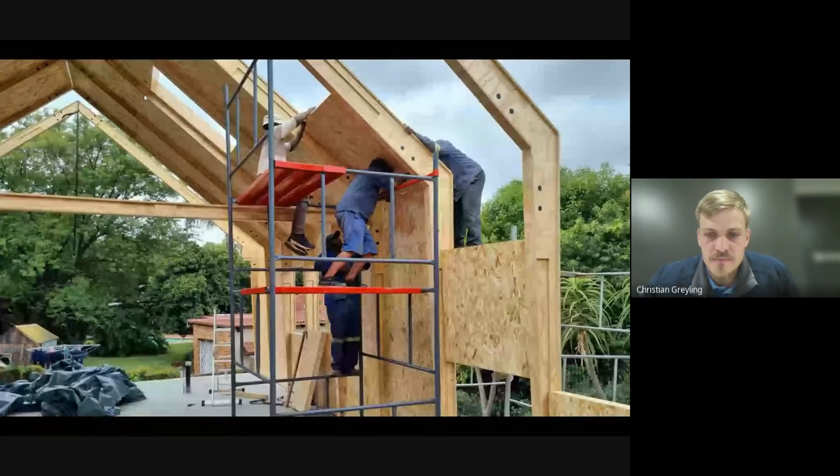Here are the guys installing the boxes, and I think this is probably one of the best images, so you can see the whole structure. So from here we just need to do the cladding and install all of the windows. So it's almost there, and then we can start with the furniture.